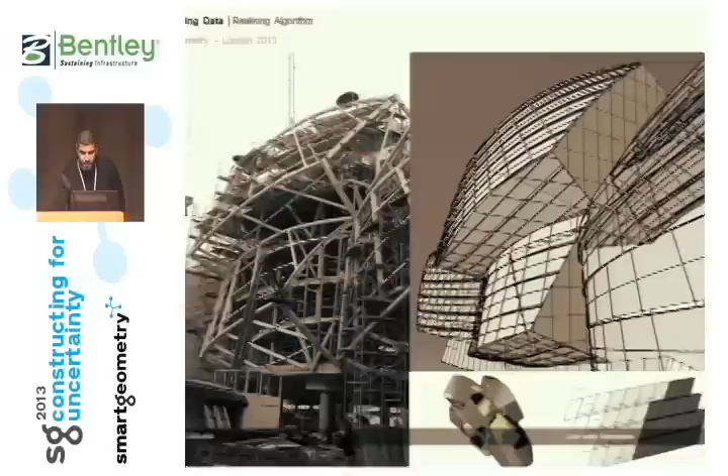So in that respect, we are not alone on the project. We do have lots of people who are going to be working with us, and they may not necessarily understand the language that we're using or the tools that we're trying to develop. We have developed a lot of tools in order to deal with complexity, and obviously this is a Gehry project in Paris, and credit to Gehry Technologies. So lots of things to do with computation, parametric design, BIM, and so on.

However, recently, things are developing more than just complex geometries. They are developing into more interactive, responsive, adaptive type of solutions and systems, whether they're digital or mechanized or mechanical. So there's this fourth dimension now being introduced, and that is increasing complexity, and accordingly it is increasing the data. So therefore, how do we communicate? How do we communicate design and construction intent, performance criteria, rules?

In terms of design and construction intent, there are the traditional or common means: sketching, 2D drawings, 3D models, physical models, BIM, and so on. However, there is an issue that always lies within doing things like BIM, and that is ownership. Who owns the model? Who is in control of the model? Can we actually hand all the components of the building that are being developed by different parties, different disciplines, different contractors, to only one party to control?

Some people may accept that, but many people will find this a bit inconvenient, and they will resist it. And it's something that I have learned the hard way on the project that I'm going to be presenting in a while. But then again, you may be able to finally do that in terms of geometric complexity. But when it comes to performance criteria, how can you deliver or communicate a performance criteria which is not necessarily geometric?

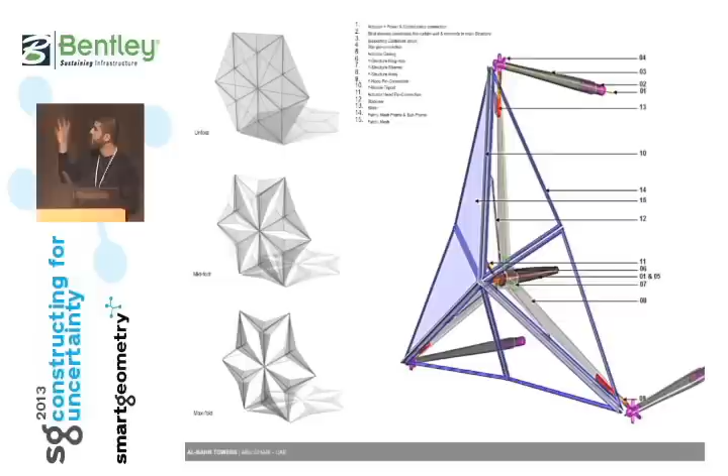And because we have this sort of organic looking building, these will come in various sizes. So we needed to make sure that whatever mechanism we develop, we're not going to end up engineering each and every single piece differently. So we needed to develop a universal solution that can adapt to the different sizes and the different locations.

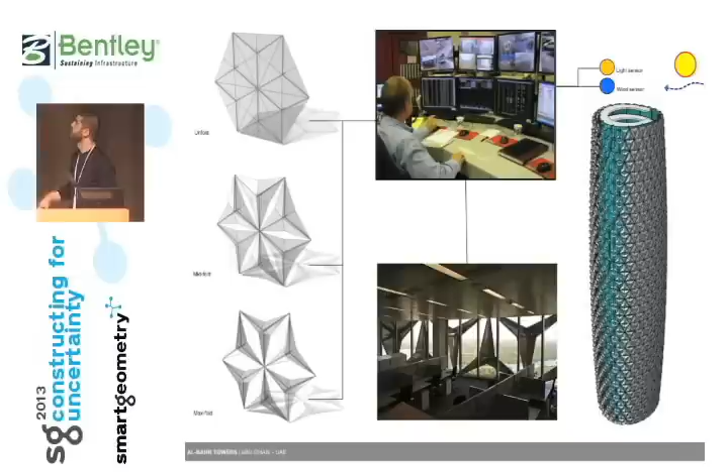So what you see here is the building that will have all different kinds of sensors, from light and wind, that will detect unusual conditions, and then will order the Mashrabiyahs to fold and unfold accordingly. We've done all kinds of optimization for the panels, the geometry, the flatness, and so on.

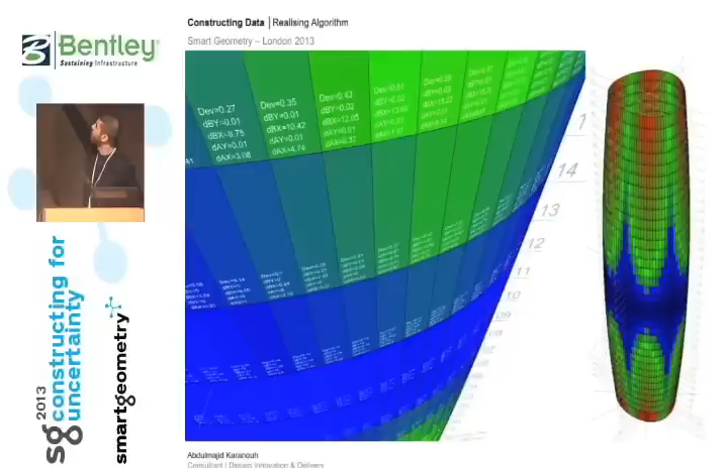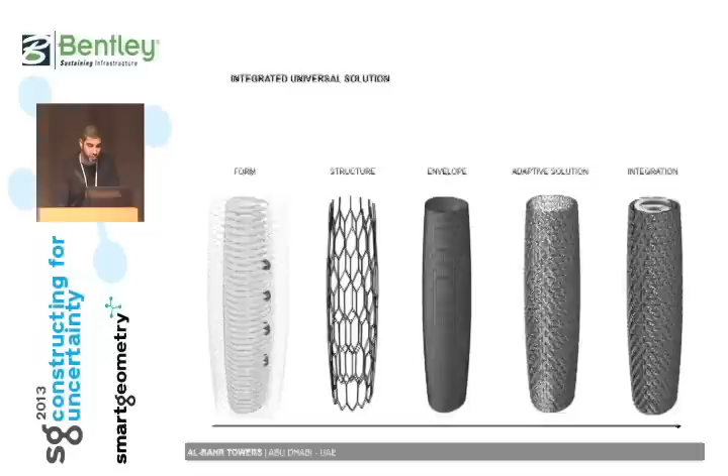And you can see there, not only have we graphically represented, say, how much each panel is twisting, but we've also digitally printed on each panel how much it is deviated, how flat it is, so that the contractors can read it, interact with it visually, and take the data numerically.

But then there's the integration of all the different elements of the building. There's the form, the structure, the envelope, and then this adaptive shading screen on the outside. So we needed to find a way not just to integrate these together, but also how we're going to communicate the data down. And this is where we started thinking of something like the DNA.

We've borrowed some ideas from the automotive and aerospace industry, where you literally create a catalog and you show, like Lego, how the whole building is constructed piece by piece, and how it develops accordingly. So we developed this 280-page manual that shows the construction starting from the grid all the way up to the performance of the Mashrabiyah and how it actually moves.

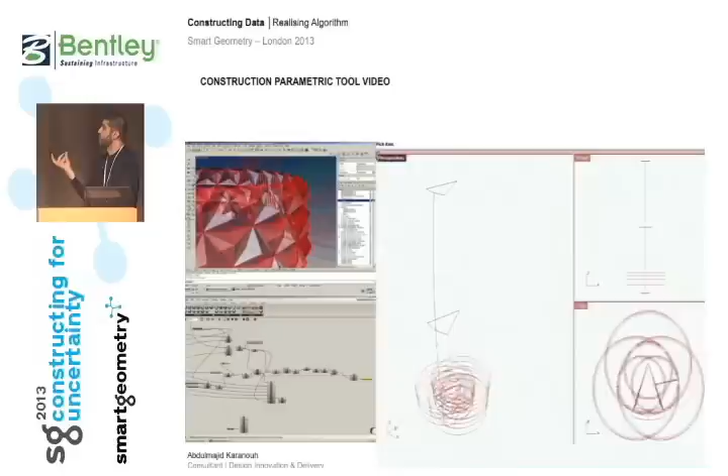So basically, we have illustrated our rules, to make it short. And then we scripted these rules just as a proof of concept. What you're going to see here is all the different components of the building, because of the Islamic geometry, derived from circles and spheres. All of the geometry you're going to see here is also constructed from circles and spheres.

And then we produce these diagrams that identify the finishes, for instance the main structure, the facade, the external shading screen, and we give these guidelines and this manual to all of the different subcontractors. I'm going to show just a few glimpses of it. So this is a quick run of the manual.

What this manual really does is liberate us from having to force the process down to a certain tool or package. We don't have to use, say, Digital Project or Grasshopper and say all of you have to use exactly the same tool. Because facade contractors, for example, wanted to use Inventor. The steel contractors wanted to use Tekla. Ultimately, we ended up using 13 different packages, not internally, but throughout the whole project team.

And it was this document that liberated us from using one package. So everyone can use their own packages and develop their own scopes to their own tolerances. As long as they're following the same mathematical rules and the same instructions, they will end up with the same geometry that doesn't clash with the other scopes.

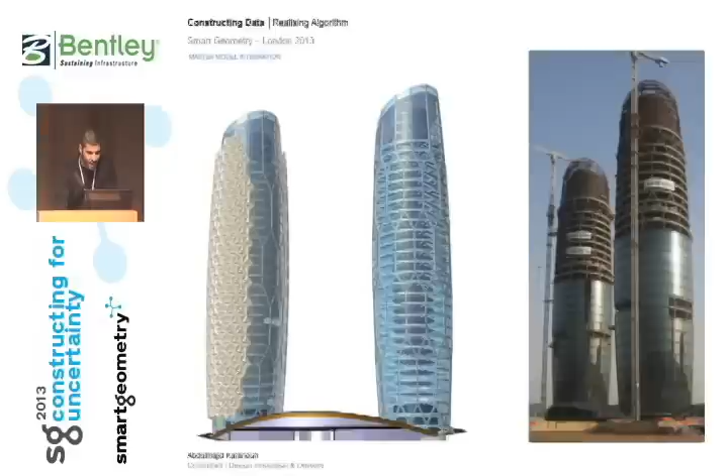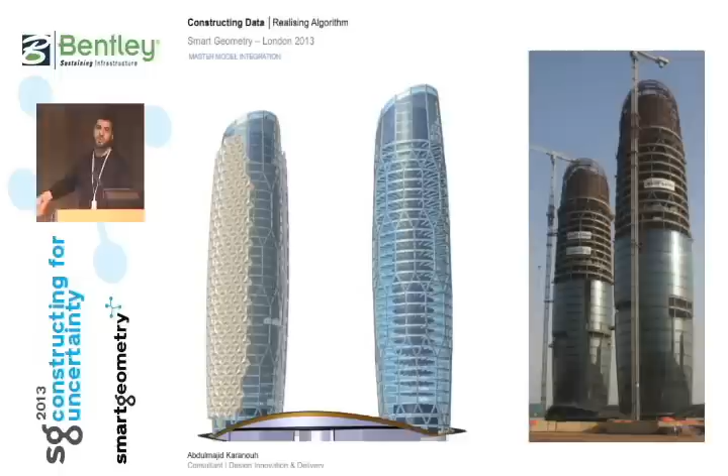And then finally, when each of the subcontractors or the contractors develop their own scope and their own items, then we bring them in together into the Digital Project, which Gehry Technologies assisted us in doing, and just make sure that there are no clashes. And it's really very easy. If we find only one or two components, we know that they haven't followed our mathematical rules. So we don't have to carry a thorough check through all the thousands of different components.

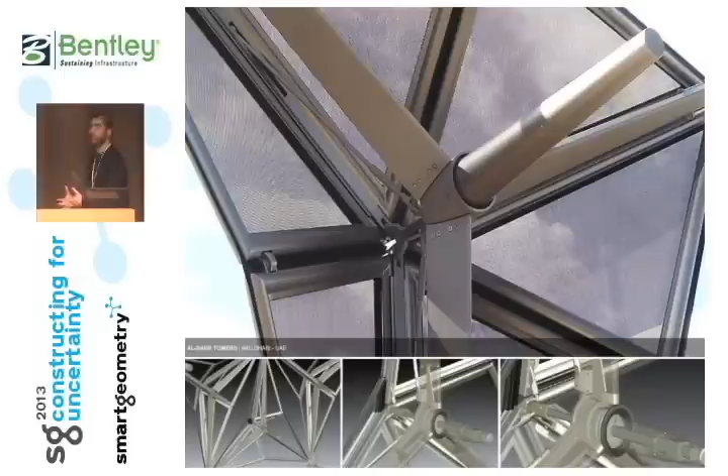But then again, there are issues related to quality. How can you, for instance, quantify something which is perceived differently from person to person and region to region, which is glare? People in the Middle East, for instance, might perceive glare differently to people in Northern Europe. And as a multinational company, they're going to have employees from all over the world. So it was important to do physical one-to-one prototypes and be able to test them. And again, you've seen in the videos things like the sand and the salt. There's only so much you can do to digitally simulate these things. Ultimately, you've got to build these up and test them.

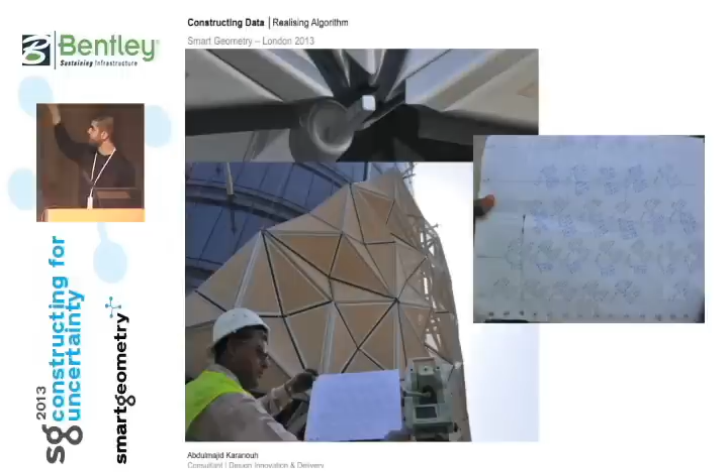So to close the presentation here, you see, for instance, the different installation methods. We measure before installation, during installation, and after installation to make sure that nothing is deflecting over the allowed tolerance. Our supply chain spanned from Minneapolis, US, all the way to Osaka, Japan.

So really, there are a lot of interrelated things related to design innovation, the context, the science, the design team, and obviously construction. But what I specifically tried to focus on for this project was the interrelationship between architecture, engineering and construction, computation, and mathematics. The core of architecture is all about multifunctionality. The core of mathematics is about algorithmic design. The core of computation is about process automation. And the core of engineering and construction is about systems design and delivering technologies which will fulfill the required performance criteria.

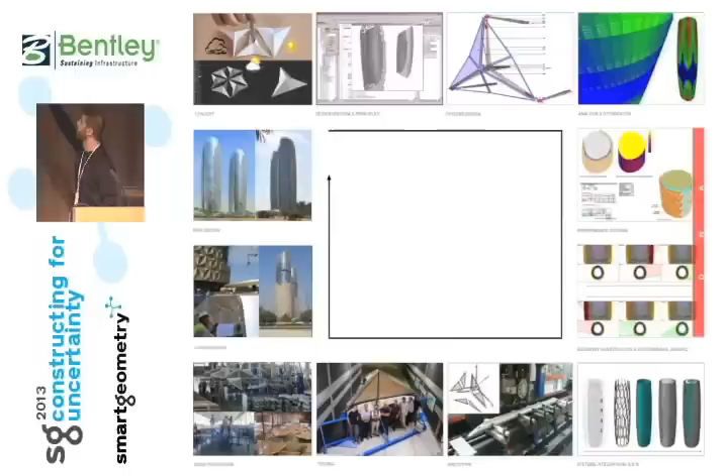So in a nutshell, we start from really simple means like little physical models or sketches, and then we go into far more advanced digital simulation. And then, the critical part, we develop the DNA of the building. Then we integrate it into BIM, and give it back to the manufacturers, who will test it, mass produce it, and finally install it. So this is the building now. We're still working on optimizing the opening and closing of the units. And this is the view from inside, and you can see the visibility is quite clear.

So the last point is, how do we communicate design and construction intent, performance criteria, and design rules? A simple suggestion would be that we need to develop integrated universal design solutions, things that can self-adjust to different cases without having to engineer every single component for every single case. Then we need to be able to illustrate the rules so that people who do not have the same background as us can understand them. And finally, no matter how confident we are with what we have seen and simulated, it's very important to build prototypes and test them, because the most unpleasant surprises lie where you least expect them.